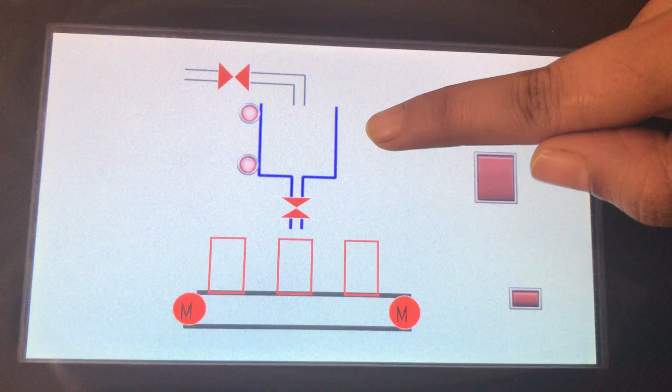During our internship, we performed one project of a water filling plant. In this project we are filling these bottles, and this is the main tank from which liquid is coming via this solenoid valve. These are the low level sensor and high level sensor, and this is the input valve, solenoid valve, and here are the two switches we have provided.

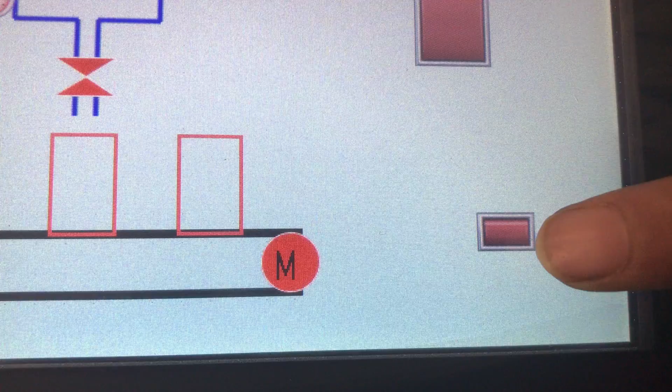This is to start the system, and this switch is to run the conveyor via these two motors attached to the conveyor belt. And here are the bottles running on the conveyor. Whenever a bottle comes under this position, the operator will manually click the switch and stop the conveyor belt, and this valve will turn on at that time, and this will first fill this tank, and the high level sensor will sense whether the tank is filled or not.

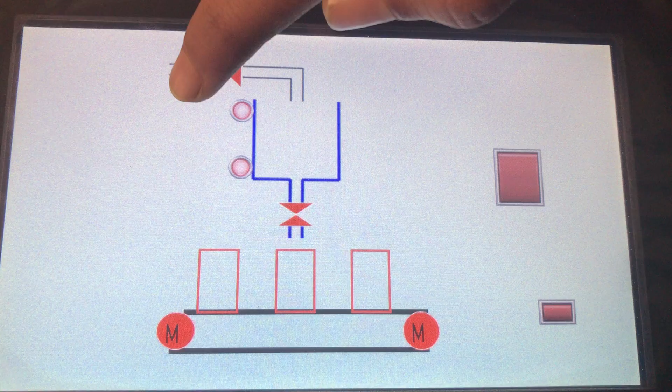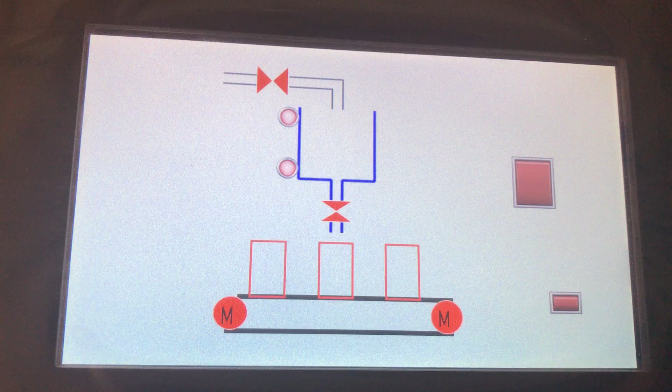Once the tank is filled, the filling operation will stop, and this V out will fill the bottle only when the manual operator is sensing whether the bottle is present under the V out or not. And during this project we use the Mitsubishi FX3G PLC and various peripheral devices attached to it.

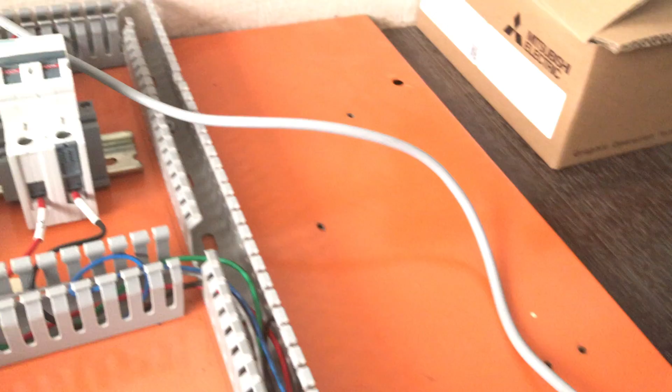This is the HMI, and we will come over to our panel. This is the electronic circuitry running our project. This is PLC FX3G. This is the cable which is used for the serial communication, RS422 communication, between the Mitsubishi HMI and the Mitsubishi PLC. Here the connector is connected, and this HMI needs earthing. This is the earthing. This is 24 volt DC, and this is the 0 volt terminal.

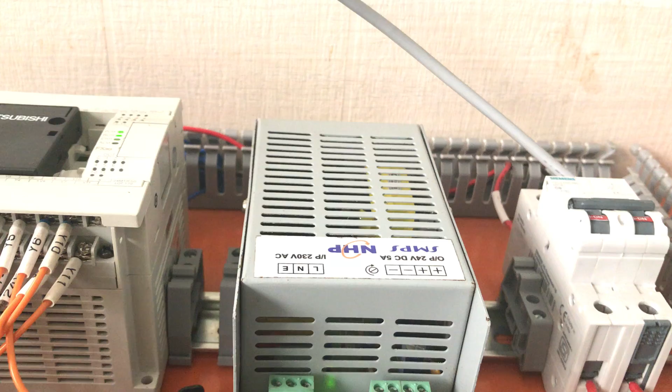We have taken all the connections from these terminals, and from these terminals we have brought the connection with the help of various peripheral devices. Like, we have brought the 24 volt with the help of a switch mode power supply. Here is the switch mode power supply. The switch mode power supply converts 230 volt AC into 24 volt DC, and we use the relay to drive the output terminals like Y0, Y1 of the PLC. And the relay needs 24 volt DC.

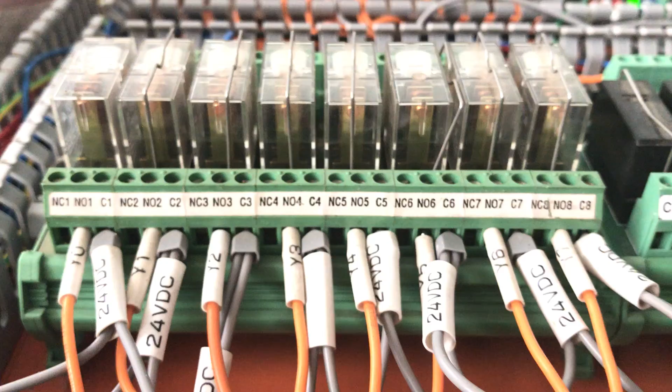That's why we have collected the 24 volt DC over these LO terminals. We have brought the switch mode power supply 24 volt DC to the LO terminal, and the 0 volt from this terminal of the switch mode power supply, and these are used for the various peripheral devices. The MCB is just for safety purposes, to cut off the L and E.

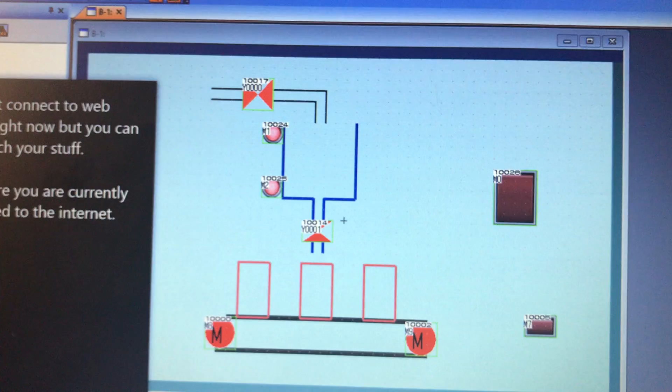Now we will come over to our coding and our software. We are using GX Developer for the ladder coding and GT Designer 3 for the HMI coding. Now we are opening our project, water filling plant. This is the project designed by us, and after that open the GX Developer. This is for ladder coding. Whatever we have written in the ladder, we have assigned the address in the GT Designer. For that, we are opening the project water filling plant 1.

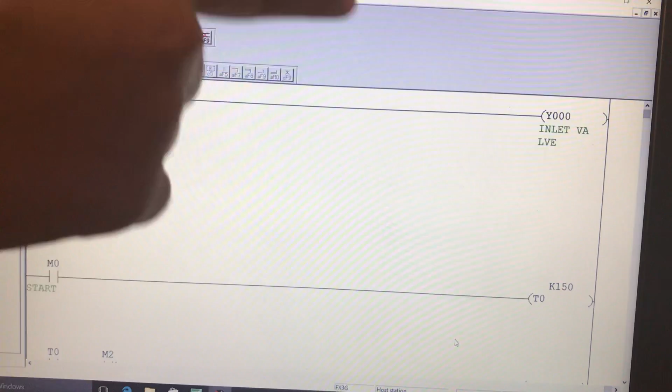This is our code. We have assigned the comments, and these M0, M1, Y0, all these labels are given in GT Designer 3. Now we will execute the program. First, go to Online, then Transfer Setup, Serial USB, GOT communication, OK, then OK. After that, write the code to the PLC with the help of the Write to PLC option.

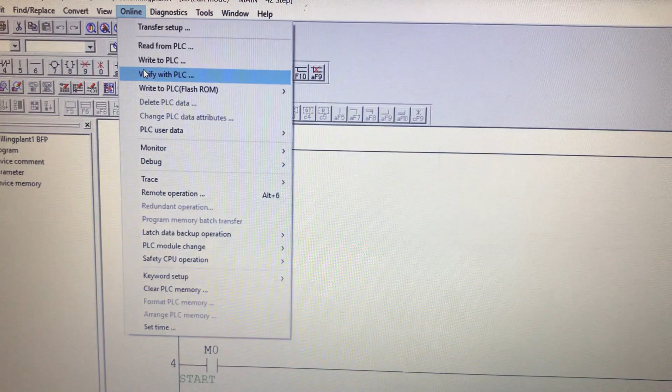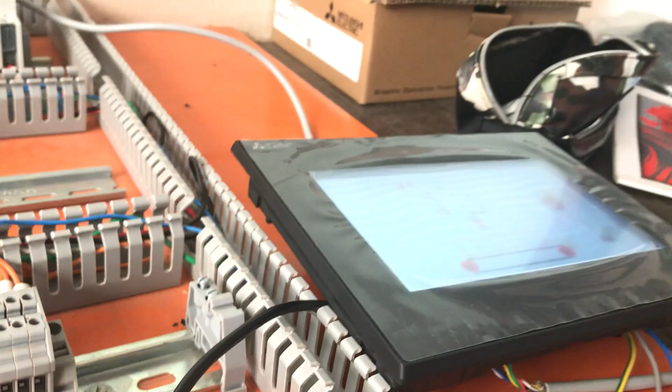In that, select parameters plus program and execute it, so that the code goes via this cable from the laptop to our HMI, and from the HMI to the PLC via the cable I mentioned earlier. Now the code is executed. Press function F3 to execute the code. Now the code is in run mode.

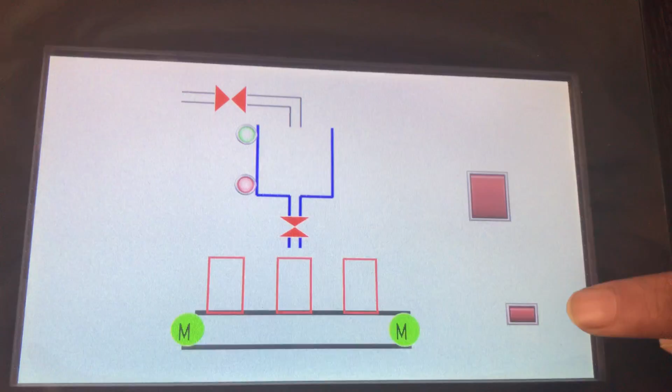Now come over to the HMI. First, press the start button. The tank starts filling via this valve, and at that time the motor is in running state. No bottle is present over there. This will fill. Sensors are off. High level is sensed. After that, the conveyor motor will start, and the bottle will come over here. It will take 5 seconds, and after that it will start running.

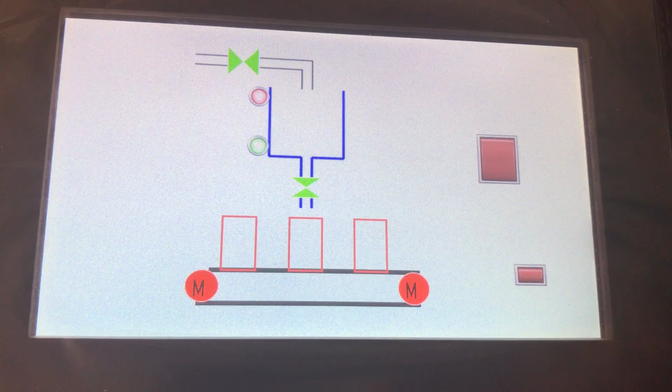Again, we are going to sense the presence of the second bottle. It will take 5 seconds to fill. Again off, motor will run. Now the third bottle is filled, and after the third count our low level is sensed. 3 bottles are filled. The capacity of the designed system is to fill only 3 bottles, so low level is sensed. After that the valve starts filling, and it will fill until the high level is sensed. We will wait for that.

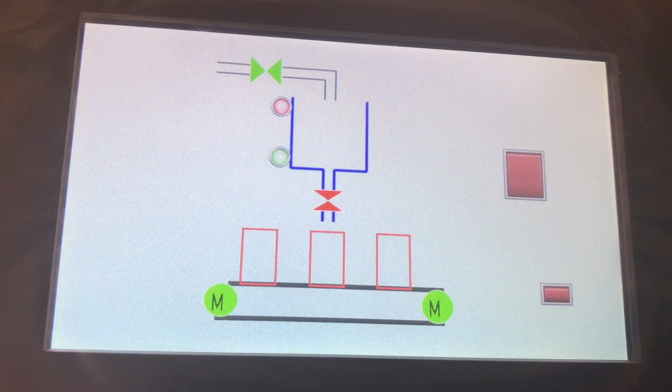At that time the motor is running and the bottle is not present. In this condition we can also press this switch and indicate that the bottle is present. So the conveyor motor will start and V out will start, but we will wait to fill the tank.